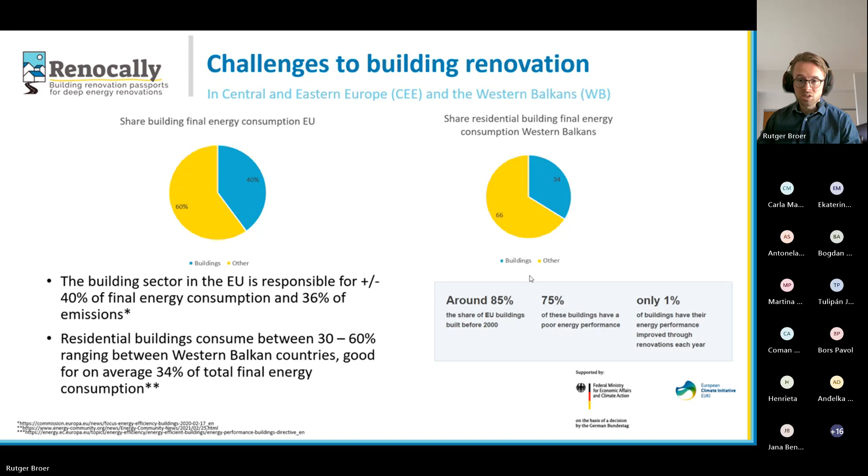So this is huge. At the same time, we know that a large share of buildings within Europe have been built before 2000, in times when there were no strict energy efficiency requirements. And around 3/4 of these buildings have a poor energy performance. So that means that there is a very big challenge to actually upgrade the existing building stock and make sure that we save energy, save costs, and also save our environment.

Now, a very unique challenge to Central and Eastern Europe and the Western Balkans is that there's a very high private ownership rate compared to, for example, Germany. I'm living in Germany, and in Germany, around 50% of buildings is rented. Now, if we look at, for example, Slovakia, only around 10% is being rented, so 90% is in private hands. In a country like Serbia, around 95% is privately owned. So this means that there is a higher responsibility for households, and specifically in times when budget is tight, this lowers the capacity for households to renovate buildings.

Now, the EU is aware of challenges to building renovation and has initiated several policies and initiatives to increase renovation rates and make sure there's more funding available. Examples are the Renovation Wave initiative. Funding became available through the Recovery and Resilience Facility, but we also had the Fit for 55 program and the Green Deal, which really set up a legislative process in which different important policies have been updated, like, for example, the Energy Performance of Buildings Directive. But we also see that there is more focus on economic development and investments in the Western Balkans, for example, through the Economic and Investment Plan.

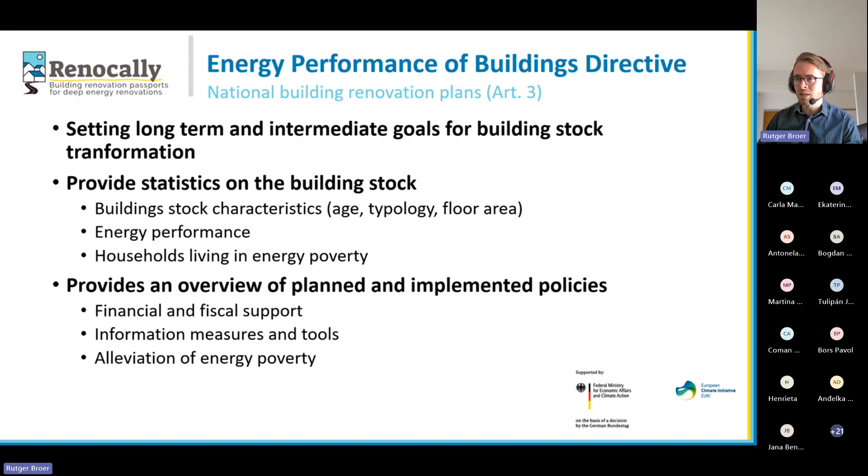Besides giving statistics, it also should provide an overview of planned and implemented policies. So basically, how do governments plan to achieve the long-term and intermediate goals that they have set for building stock transformation, but also information and measures and tools enabled to provide the necessary information to local authorities, but also households and companies to actually make the renovations, and measures they take to alleviate energy poverty.

So over the last years, a lot of discussion has been held around the minimum energy performance standards. And in the end, in the EPBD recast, the minimum energy performance standards only apply to non-residential buildings. So basically, a minimum energy performance standard says that as of a specific year, all buildings in the building stock should achieve a specific performance. For this, a maximum performance threshold had been set.

So what does that mean? The Commission has said, okay, we look at what is the performance of the buildings around 2020, and we draw a line at 16% and say all the 16% worst performing buildings need to be renovated by a specific timeline. So in this case, it says by 2030, all buildings below the 16% threshold should be renovated, and by 2033, all the ones below a 26% threshold, also based on 2020. Now, this sounds relatively complicated, and it is.

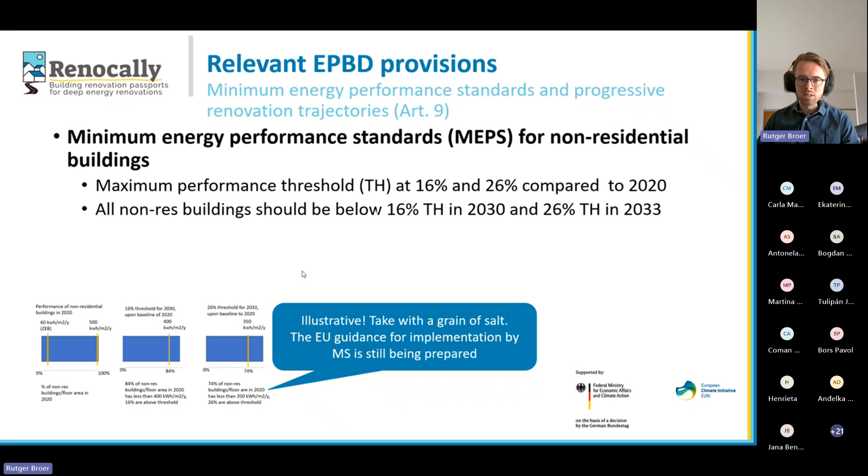Now, the European Commission is aware of this, and they are preparing technical guidance for member states, and they are consulting the member states for all their questions. And the guidance is expected by the end of this year. So, the European Commission will help member states to draw these thresholds and also make sure that they know how to implement that in legislation.

For residential buildings, it's a different situation. So here we're talking about progressive renovation trajectories. So rather than looking at specific buildings, the trajectories look at the average of the entire building stock. And here the goal is to decrease average primary energy consumption in kilowatt hours per square meter over the entire stock compared to baseline year 2020. So by 2030, this average primary energy use should be decreased by at least 16%. And by 2035, by 20 to 22%.

Now, 55% of the decrease should be achieved among the worst performing buildings. You can see here that this is formulated in a way that gives a lot of flexibility to member states in order to define how they will achieve it and which buildings will actually be renovated. That was done on purpose also because of concerns for strict regulations that might have negative effects on households that already struggle to make ends meet at the end of the month.

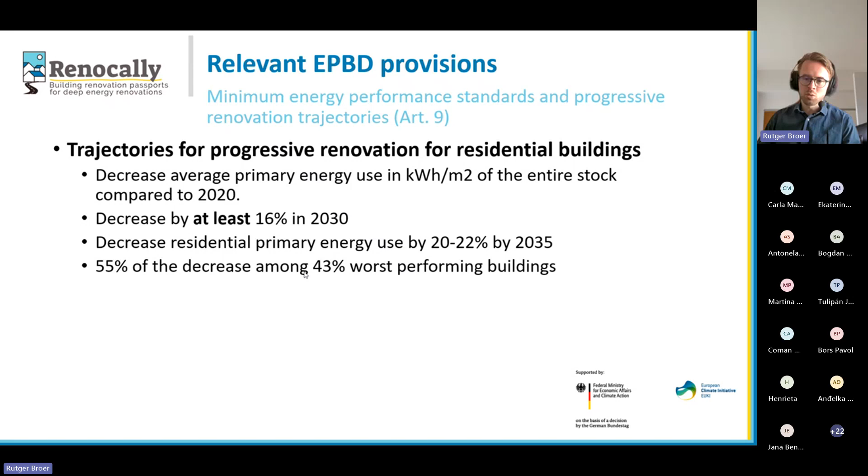So it's still to be seen, also in the guidance that will be published by the end of the year, exactly how the progressive renovation trajectories will be shaped. And we can expect differences between countries. Going on, we look at solar energy in buildings.

So member states should ensure solar panels are installed on new and existing buildings where feasible, technically and economically. So this is important to reduce our fossil electricity consumption. And from basically the beginning of 2027, this should already be done on all new public and non-residential buildings larger than 250 meters. And afterwards, these requirements are being fed into other types of buildings.

So basically by 2028, for all existing public buildings with a useful floor area of more than 2,000 meters, so big buildings, and then 750 square meters by 2029 and 250 meters by 2030. That means that there will be a big impulse for public authorities to start installing solar panels on public buildings in the coming 5-6 years.

And member states shall establish and make publicly available criteria at national level for the practical implementation of the obligations set out in the article. So again, member states should provide information so that everyone knows how these type of provisions have to be implemented. And make sure that these criteria are in accordance to the technical and economic potential for solar installations and building characteristics.

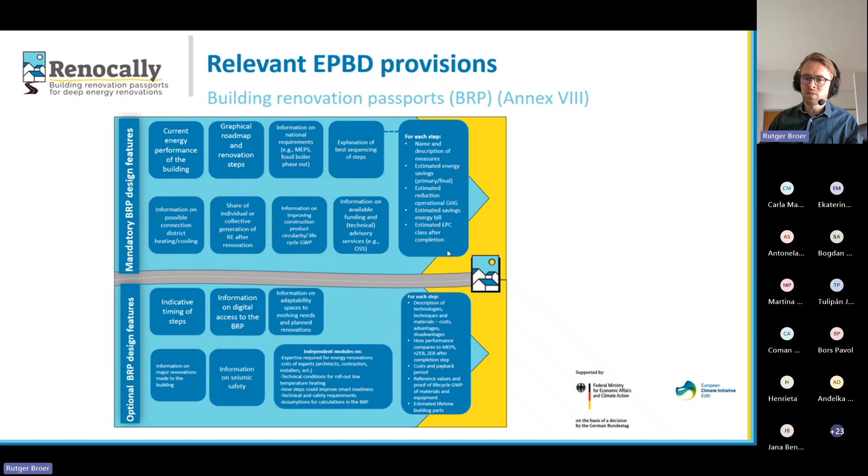Now, if you have that type of information, you still need access to funding in order to be able to implement the renovation. And for that, the EPBD sets out that member states should provide appropriate financing to implement their national building renovation plans, what we started the presentation with, but also to ensure simple and streamlined applications for public funding, so to reduce the bureaucratic efforts that are required to get access. For example, through the use of energy efficiency funds that already exist in many countries, and at the same time require member states to introduce effective safeguards to protect vulnerable households.

Now, other tools or institutions, I should say, that should really help improve access to information are one-stop shops. So one-stop shops are really centers, one place where you can go with all your questions related to renovations. For example, by providing streamlined information on technical and financial possibilities. So one-stop shops should be designed to provide holistic support to all households, particularly households affected by energy poverty, and they may offer dedicated service.

Now, one-stop shops are possible institutions that could promote the use of building renovation passports, but there's also a close link with local authorities that might, on the one hand, enable and support the establishment of one-stop shops, but also being locations or centers of expertise where people working in local authorities can go if they want to renovate buildings.

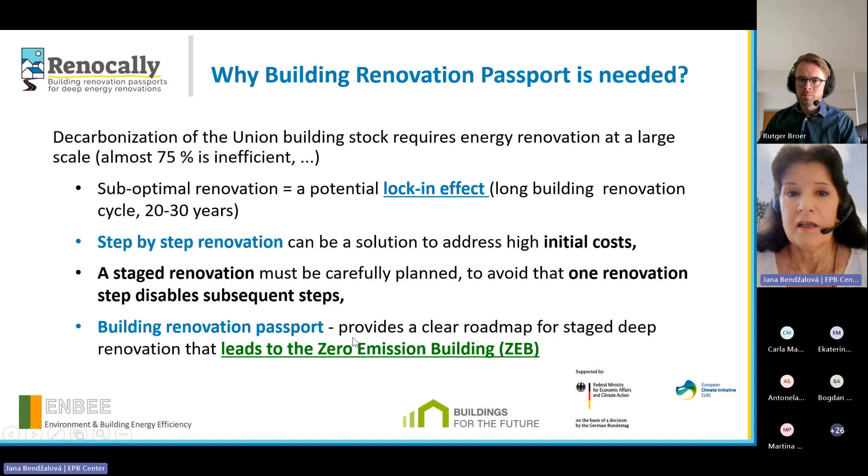A building renovation passport should always provide a roadmap for staged renovations that leads to zero emission buildings, which have to be defined by member states in the future. What it should contain is specified in Annex 8 of the revised EPBD from April 2024, and it gives a common framework. I will focus on the features that are connected with practical implementation of this renovation passport.

So it should be based on on-site inspection and on dialogue with building owners, and should provide the optimal sequence of steps and timing of steps, taking into account the lifetime of measures, but also the lifetime of existing constructions and systems. It should provide information about each step, about savings in terms of primary energy, final energy, and CO2 emissions, but also information about expected benefits additional to energy savings. So these are reduced costs, improved comfort, improved smart readiness, and so on.

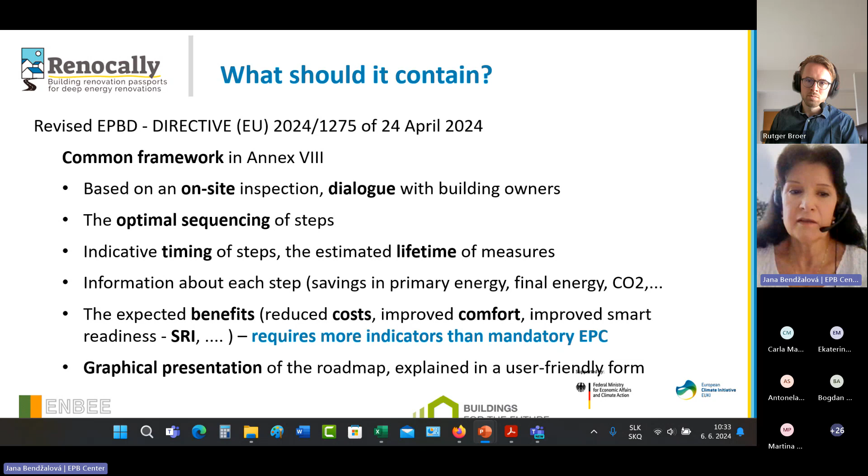So it requires more indicators than the mandatory EPC. And it should be expressed in some user-friendly form for owners, so there is always some graphical presentation.

So what is the situation in Slovakia today? An official building renovation passport is not in place, but is currently under development. It is quite well developed because the first draft was presented to professionals, and there are some ongoing trainings on this. It will be an Excel tool where it will be possible to select some renovation options, but it will not provide calculation. Manual inputs from external tools for energy calculation will be needed, so all software used until now will be allowed.

What is very important and useful is that it contains the unit costs for renovation options, for renovation steps. This is very time consuming and also should be harmonized somehow for professionals, so this will be very useful. And it will also provide a mandatory reporting template.

What is also very important from the point of view of this pilot development of renovation passports we are doing now is that the ministry assumes there will be a testing phase when professionals will get this tool and can play with it, and they will expect feedback from this testing phase. So there is a huge opportunity for this project to provide feedback and experiences from these real building renovation passports.

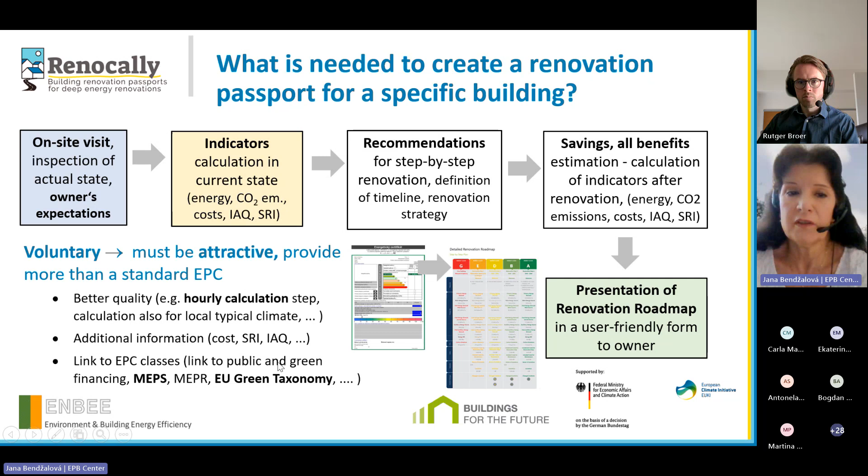So finally, it is a presentation in a user-friendly way to the owner, with explanation of individual steps. So a bit more about additional indicators which we plan to implement in our building renovation passport. I must say it is huge work, so our work is not finished, and these are just examples from other buildings we already evaluated.

Firstly, it is a thermal comfort score calculation that is possible only if an hourly calculation step is used. This is a new option in Slovakia because we recently introduced it in the technical standard. It will take perhaps a few weeks to really implement in the standard, but we have a typical meteorological year for hourly calculation. We will use tools developed by the ALDREN project, which is also used in the EPC recast project, and is based on European standard 16798.

Then we will calculate a smart readiness indicator. We will use the official Excel tool provided by the Commission for this. We will also use the measured energy from administrators of buildings if they provide relevant data for calibration of the calculation model. And we will use the tool for normalization to standard conditions developed in the EPC recast project. So this is the report on the left side. This will be additional information, probably not required by the mandatory building renovation passport yet.

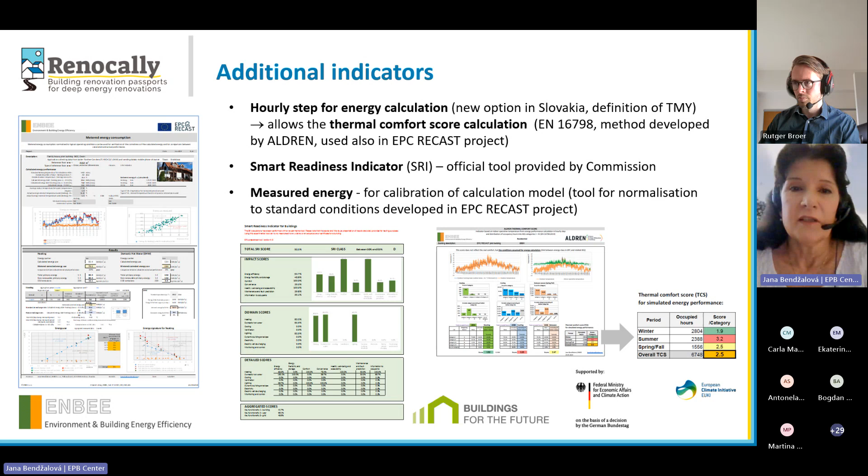Now Slovak specifics. I have to say that in Slovakia, I think we are the only country in Europe that has 4 types of accredited experts involved in standard EPC development: a special expert for thermal envelope, for heating and domestic hot water systems, for ventilation and cooling, and for lighting. So there is potential for high quality recommendations. This is a huge advantage for the building renovation passport, because I cannot really imagine giving good advice from one person alone. It was a good decision in 2005, when we implemented the first EPBD, to have these 4 types of experts, each with his own accreditation and stamp.

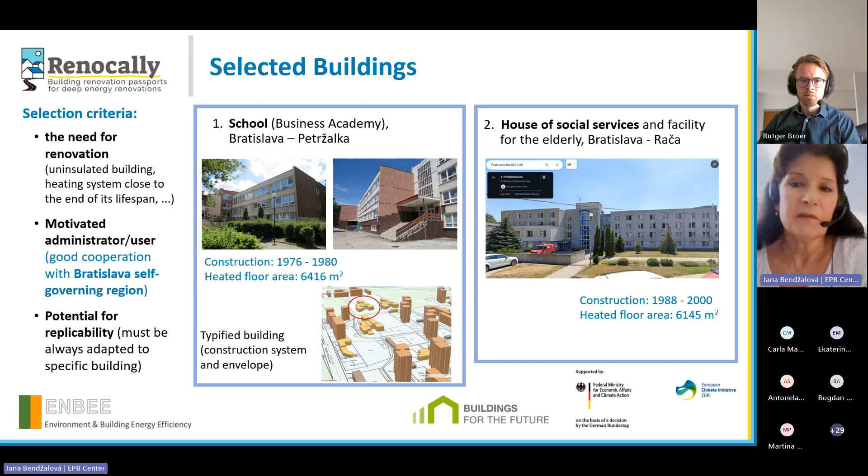So about this school in Bratislava, Petržalka, the envelope is in original state. Windows were changed in 2007, so it is not high quality. It has a gas boiler room, so they disconnected from district heating, and this was also the reason - the boiler room is from 2009 and has centralized hot water preparation with circulation. So it is quite close to end of lifespan, and that was also a reason why we selected this building.

Our recommendation will be in this order: windows change, or perhaps only glazing, because we have experience from Bratislava that in some cases just glazing can be changed to triple glazing, but this is up to more detailed investigation before works and before start of the design of renovation, because I have to say that building renovation passport does not replace the design of renovation. So it is just an idea for design, not really design.

So we will propose additional thermal insulation of envelope, heating system. We consider alternatives connection to district heating, because it has very low primary energy factor, sometimes 0.15, and or also perhaps heat pump. So this will be up to discussion with owner.

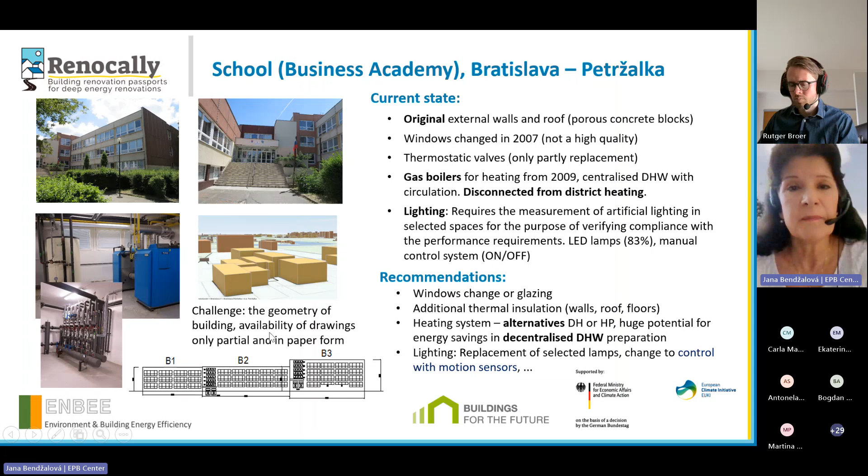So the last step will be presentation of results. It should be simplified, explained in a user-friendly form. So we will use this iBRoad project tool because we have no other, and also it is nice and it is intention of this project, but we will perhaps try also to produce an official Slovak building renovation passport if the template will be available before the end of the project. It should be available in summer because the building administrator is interested in an official building renovation passport that will be obligatory for public buildings.

So what are the main challenges? It is the calculation method and the tool for calculation with hourly step for correct energy performance assessment and savings predictions that is important for optimization of renovation options. We will use Italian software, which is based on CEN standards in this project, but I always stress that there is need for a common European calculation tool and calculation kernel to have really reliable results on energy performance.

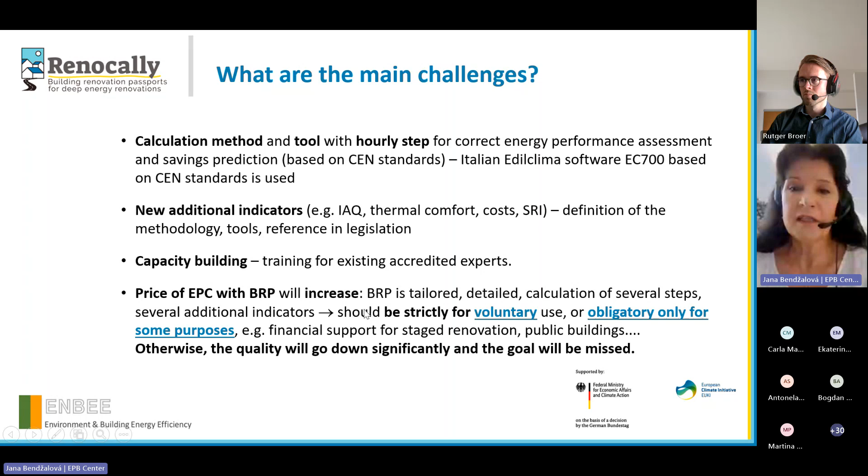So recommendations for public authorities is that there should be a link between building renovation passport and EPC scheme, because it should be issued by the same expert, since there is already codified and existing methodology, quality control, accreditation of experts, so no need to develop something new.

On-site visit must be mandatory, because there is also discussion about this, if it should be mandatory or not. For EPC, it is not mandatory and the quality is very low. So as I said, it should be for voluntary use, and obligatory should be for financial support of staged renovation and perhaps for all public buildings, but the identification of trigger points - when it is obligatory and when not - should be very clear and well estimated to not decrease the quality.

So definition of methodology for additional indicators, it should not be free, it should be somehow harmonized to keep the quality. And also for discussion is how to solve the local versus standard climate for cost efficiency calculation.

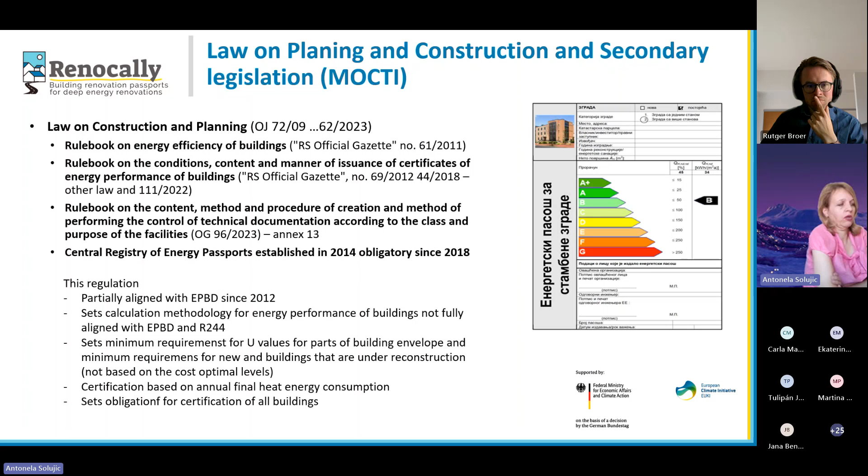Speaking about the two financing mechanisms which we had in the past, one was the budgetary fund that started operation in 2014 based on the law on efficient use of energy. It is actually just a budget line in the budget of the Republic of Serbia, and it was operated by our department in charge of energy efficiency, and the main ministry in charge is the Ministry of Mining and Energy. The grants are provided based on public calls and eligibilities for public and private entities, both citizens or commercial sector.

Operation is based on the annual financing program, which is adopted by the government. And there is a rule book prescribing the manner of funds allocation, which prescribes some requirements that have to be included in the public calls and sets some criteria. So within this process between 2014 and 2021, because it was replaced with the Energy Efficiency Administration, we developed various types of subsidy schemes. But mainly the subsidy for public buildings was implemented. This is the one which we implemented the most in this period. And in 2021, we also implemented some pilot activities with citizens.

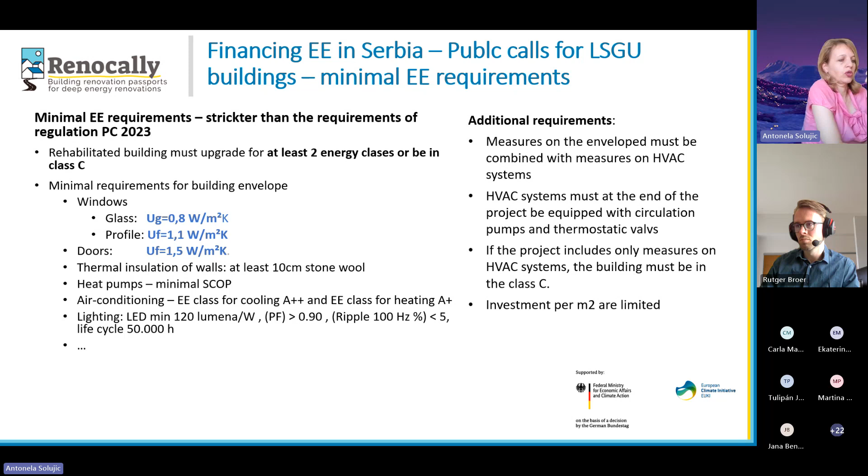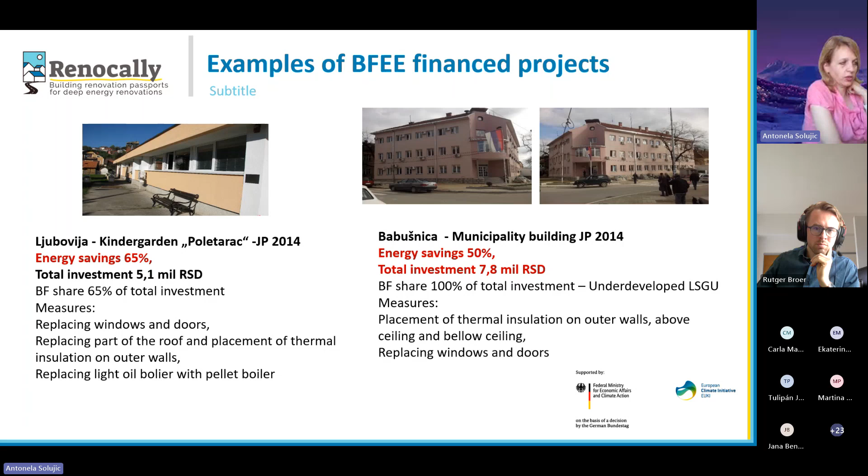Here are examples of some buildings, even from the very beginning, from 2014. So we were able to estimate the cost and calculate the energy savings, because we developed a bottom-up methodology for reporting on the NEEAP. That methodology allowed combining energy elaborates, which precede the energy passports, before and after implementation. We also included additional calculation methods, for example for installation of new boilers, which was also aligned with the EU.

So how does the scheme work for the citizens? For the citizens, of course, the criteria are a little different. We offered them one measure in the past with a pilot, which was implemented in 2021 from the state budget.

But with the World Bank project, we made some packages, which you may see here. For individual measures, they can receive up to 50%. That is the same as what we had with the public calls. But now we also have packages. So there is a basic one, which includes at least 2 measures on thermal envelope, so they have more subsidy.

Then we have the standard package, which includes the basic package plus some measures on the space heaters and the necessary infrastructure, as well as, sorry, I missed translating this. This is the advanced package, which also includes the renewables. You may find more information on the link here, and we expect huge savings.

But how does this mechanism actually work? It works in that way that the funds are coming from the World Bank. The ministry is issuing the public call for municipalities. Municipalities are very important in this scheme because there is a lot of logistics which we need. On one hand, they're going and checking the potential projects in the field. And also they are providing half of the subsidy.

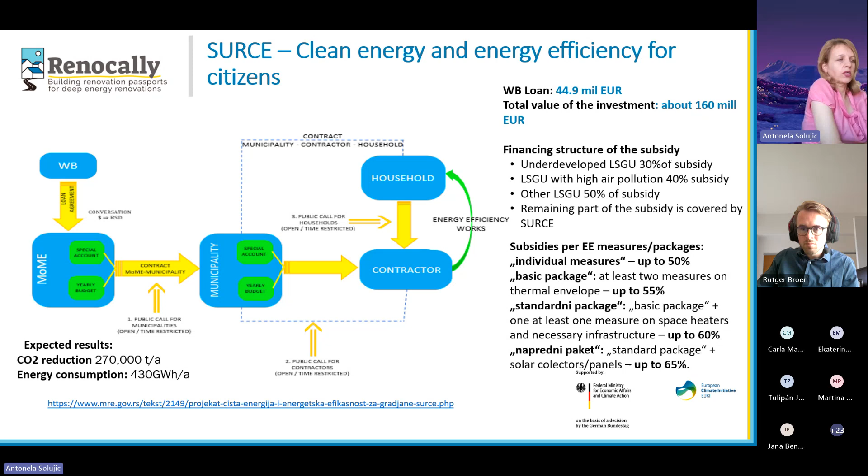So when the households apply, they have to get some papers from the contractor and apply with those papers. If they're selected, the contractors do the works, and citizens pay their own share, while the municipality pays the contractor directly the share of the SURCE project and of the municipality. Maybe it seems too complicated, but in practice it is time consuming, but it's doable.

This scheme is a scheme for multifamily buildings financed by what we call shortly the Public ESCO project. It is done by EBRD based on a mechanism that was developed by the municipality of Šabac. It is focusing on the buildings that are connected to district heating. It is a kind of public ESCO where the repayment of the loan will be done by the citizens through the district heating bills. So how it is organized: the EBRD is providing the loan and the donation.

50% repayment of the loan will be done by the citizens on district heating system bills. 50% investment will be repaid by the government. And there is this grant component which will help to overcome some barriers, to provide technical assistance, and to help the energy vulnerable population living in these multifamily buildings, in order to not hamper the whole project because we are lacking the procedure.

So it will focus on insulation of the envelope and, of course, measurement and regulation of the heat consumption. Both measures and subsidies will be based on the results of the study per each building. So how is it actually implemented? A public call by the ministry was issued a few years ago, and 15 municipalities joined the program. At the end of last year, all the municipalities issued a public call for buildings.